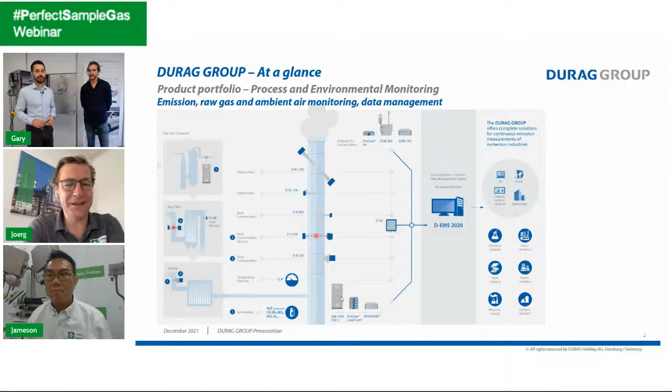It's a good point. And maybe the next screen kind of contributes to that, because you see that AP2E isn't just on a stack. It's not just monitoring process. It's also ambient, the air we breathe. And you talk about, well, I have a stack. It's quite dirty. There's a big cloud. Here we have some of the products of our group for monitoring the quality of indoor air, ambient air, or for research purposes.

And that is particles, fine particles, and also gases. And a few examples there, like formaldehyde or H2S, smelly gases. So again, it's these products that help not only a government or an authority to monitor, but it helps the company, it helps the industry to understand more about what's going through their process. Knowing that can help them to be more efficient, maybe even save money, and improve the conditions for the people around the site.

Yeah, I think that's always nice to show that these are maybe the two main showcases we have, right? The one side is really the emission monitoring, sometimes tough in terms of price requirements, because in many countries, I would say, most of the operators would just choose whatever is sufficient, but not more. And I think when you do the process analytics and process optimization, that's pretty much what you are talking about, Joerg. You talk about business cases, right?

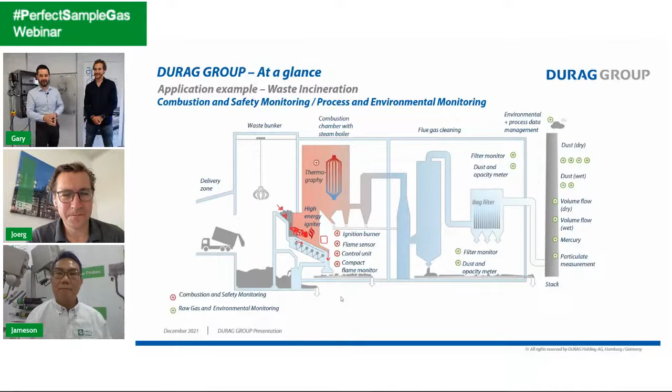Okay. Now I think it's very clear what you said at the beginning, the left part. Now it's very clear. Exactly. You can see where all of the brands suddenly arrive as a solution. So that was a very quick deep dive into DURAG. What we want to do, of course, is focus on AP2E, which is why we're here today.

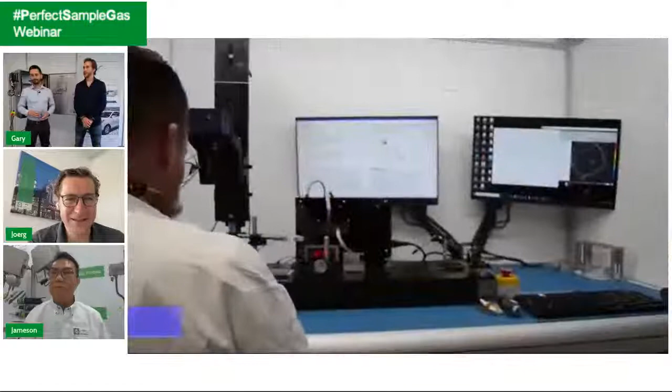And for that, I think we can give a short impression. Gary, it would be super nice if you can walk us through this video a little bit. That's starting with a quick presentation of AP2E, focusing on our production facility. So as Joerg explained very well, we are part of DURAG group, and we are a provider of new solutions for gas analysis in particular, with a very innovative way of answering the needs.

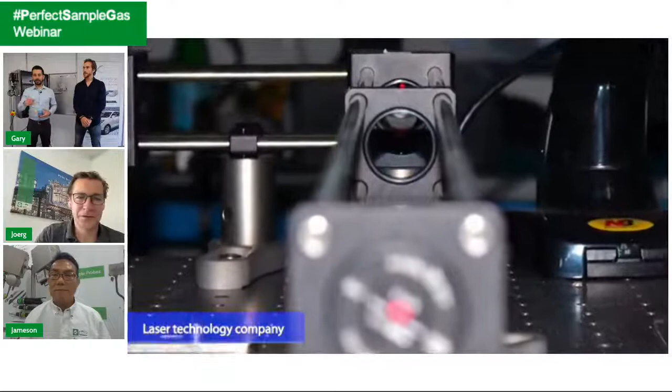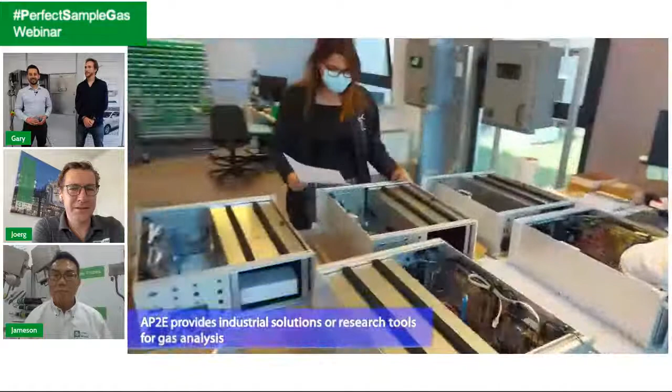That's it. We could of course run through the factory, but it's not always so easy. There's a lot of sensitive projects, so we use this video to take you on a tour through the facility. It's a bit more efficient, I think, for us, right? It's a good introduction to AP2E. So that shows your R&D facilities, and this is the production itself now. Okay.

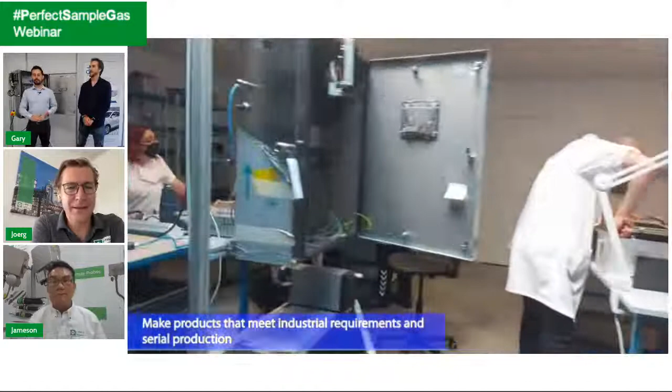You can see a wall-mounted analyzer like the one we have behind us. Earlier on, you saw the optical mirrors being aligned. There's lots of different processes. That's the technical part, more deep into optical cavities. So these are mirrors, right? Exactly. Mirrors and lasers, tuning before production. Okay, and this is the qualification at the end, the calibration.

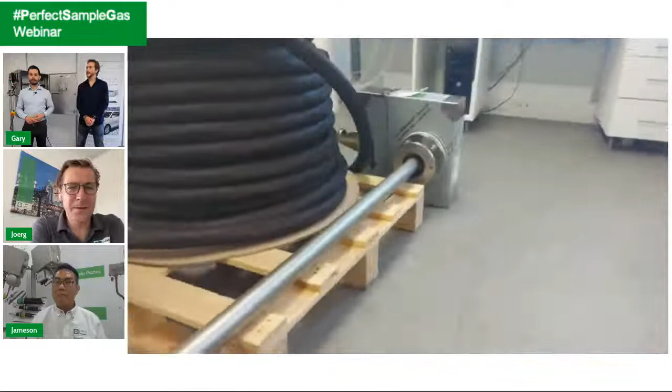Here you can see the same emission probe, and now we're switching to the metrology part. I don't know if the video is still going. No, I just stopped it. Okay. You will see just after that the metrology part, which is the heart of our company, and the know-how of AP2E.

There you go. Great. Thank you so much for this. With this video we wanted to give a flavor, right? We didn't want to just be here and not show it. So at least now you can see the different stages, the different processes, and even some of the sensitive work that they're doing there underneath us right now. Okay. Thank you for sharing this.

So I think we can jump back to the slides. Okay, sure. So there we are. And you have to double click. Yeah. And again. And again.

Yeah. And so now we can focus a little more on one of the many projects of DURAG Group, and us at AP2E. So we are based in France, south of France, and we have a lot of partners, thanks also to our colleagues all over the world. And as you have seen through those great videos, we are now about 65, and we are completely technology oriented, with more than half of us engineers or PhDs, and focused on improving continuously the techniques in innovative ways.

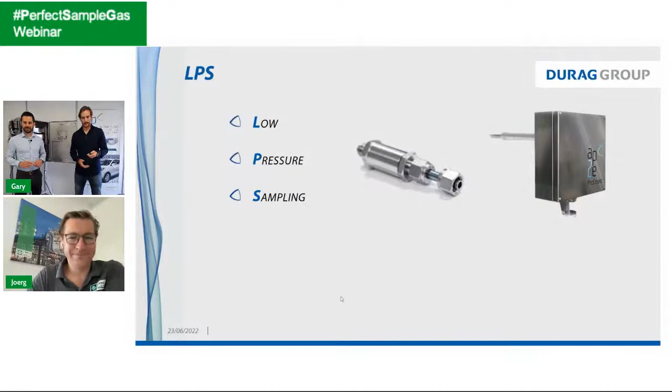So maybe, Jörg, we can go back to the slides. Yeah, no problem. Here we go. Here we are. And so as we explained, I think now it's completely clear. We have an extractive solution, so we start here with, for example, continuous emission monitoring.

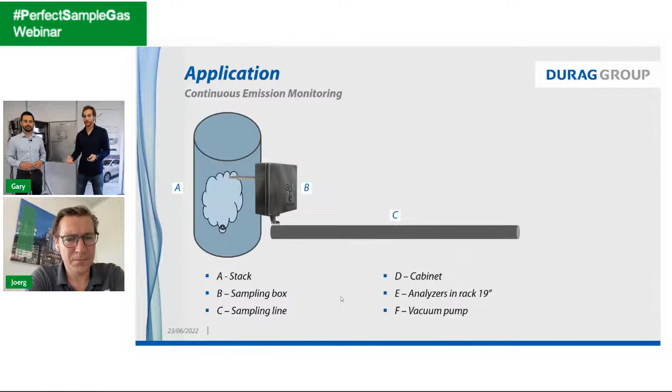So we start with a sampling box directly on the stack, and then we draw a line, heated or not, up to the analyzer. And this time you can see, as we have seen the wall-mounted version, we can also have a cabinet version like this one, with at the end, here at the bottom of the drawing, the pumping system, which is the second key of the low pressure sampling. We have the sonic nozzle and the pumping system, and without one of these, we won't be able to have the low pressure sampling.

And this is probably something a lot of people recognize when they think about gas analysis, right? Yeah, I think it's very familiar to a lot of people. It's good to see, because this may be a bit different. Let's see where it goes.

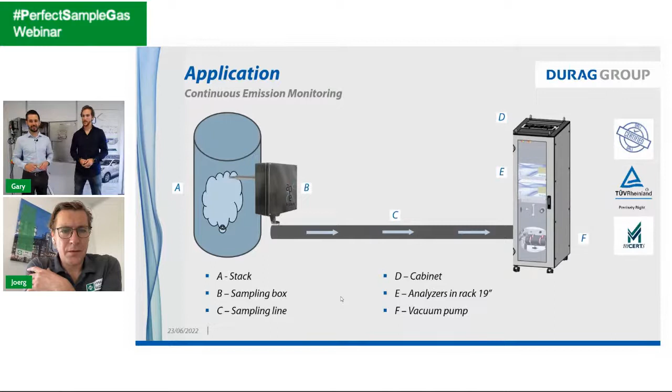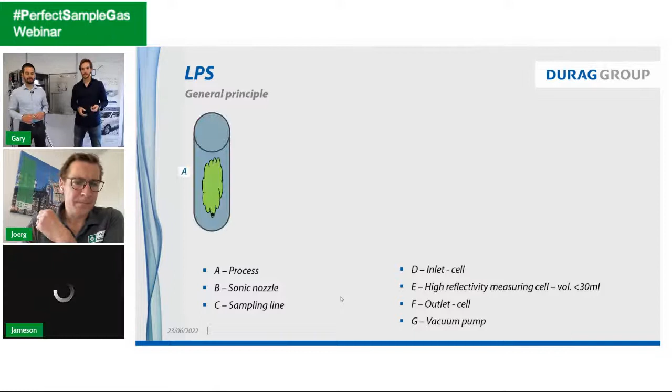So if we dig a little more in that schematic, you see we still have the process, and inside the sampling box, or directly in Johan's hands, you have the sonic nozzle. Maybe now's a point where we could show what a sonic nozzle is, because this is our sampling point here. This is point B. What's inside? So do you have an example of it? Yeah, for example, I have one here. That's my sonic nozzle. Maybe you won't be able to see anything. It's very, very small. What is a sonic nozzle?

Actually, it's a small tube with a very thin orifice on it. This one, for example, is 200 microns. So it's very, very thin. So the sample gas is coming, and it's the only way through, and this is how it allows us to reduce the pressure after that piece. Okay, so that means in the sample tube, until the point where you have this nozzle, you would have a higher pressure, theoretically, in this first section. Or in this first section, we have a filter here or something. Yeah, that's it, however long the first section is.

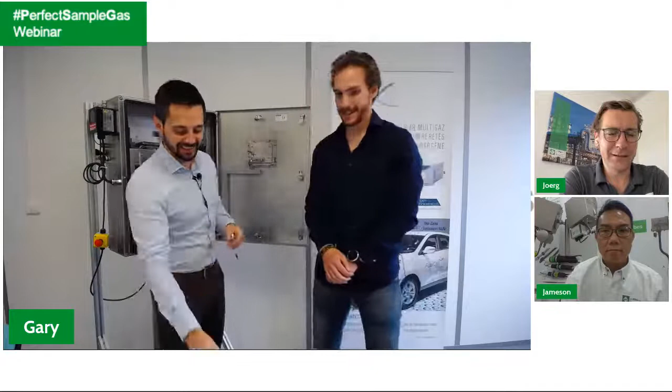After the nozzle, which in this instance I will show you side by side. You have the nozzle here. After this, this is your gateway. Afterwards, low pressure, if I'm right, Gary. Exactly, you understood completely. And so it starts right at the sampling point, directly at point B in the slides. Let's go ahead, I think it's very interesting to understand.

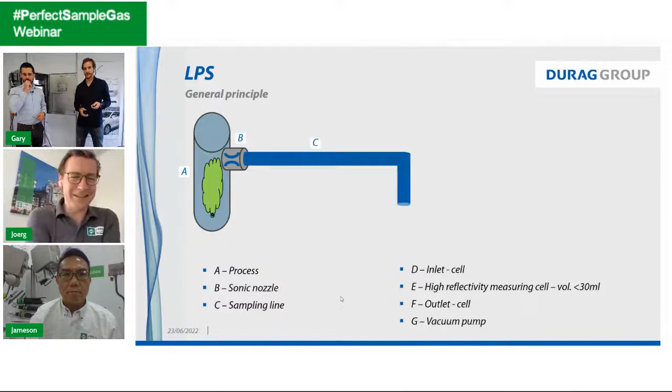So same thing as this one. We have a sampling line, and this is our cavity inside the analyzer, the heart of the analyzer, the measuring cell, and then the gas is sucked by a vacuum pump at the end, which can be integrated into our wall-mounted version, or it can be on the side, on the bottom of a cabinet.

Maybe, I'm just thinking, is it good to show it now? Yeah, I think it could be. Could you switch to my camera? Sure. Lovely, we have so many screens here. So now you can see it.

So we wanted to share a real application, a real analyzer monitoring live the ambient air in the room. So you see it here, and I will try to move slowly. Here is another version, the rack mount version. A more classical version, maybe. Yeah, people are used to a 19-inch rack mount analyzer. Same thing.

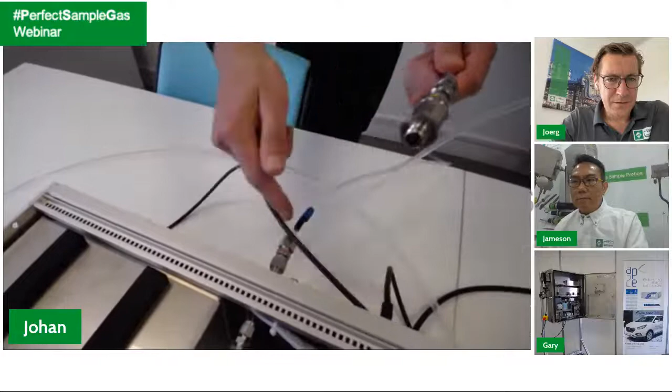So Gary, for understanding, the probe, the nozzle is connected to the analyzer or to the pump - what is the order? It's connected before the analyzer. So I have the probe here, and the probe is coming through and into the analyzer. The gas will follow through the measuring cell, and the pump is behind, sucking through.

But I mean, we could show it if you're ready. Yeah, we can also show a bit more about it.

So inside this box, you have some laser. Of course, we have to switch off the analyzer before, for safety reasons - we'll turn it off for our own safety and to keep our eyesight. So please go ahead. You shouldn't get cut or anything hurt from the laser.

This is the second heart, I would say, of AP2E's technology - this is the optical block. So with the measuring cell, as you have seen in the slide just before, the laser and some optics on the bottom. Here we have optical mirrors and reflectors, with an incredibly high reflectivity that allows the product to have an incredibly high sensitivity and selectivity.

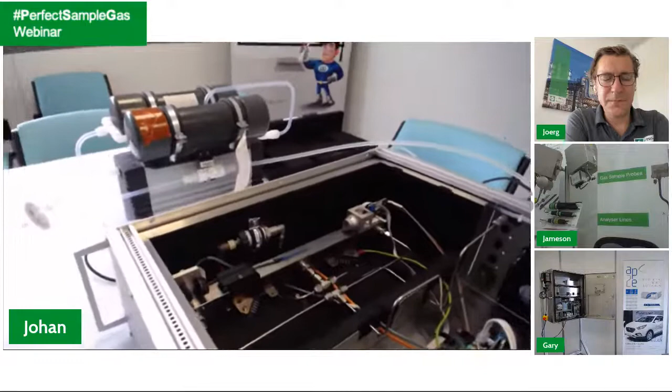Though you have seen that we are able to measure 3 different gases with only one laser in this application, we can also add another cavity just on the side of the first one, with a different setup and another motherboard, some electronics, in order to increase the number of gases we can measure, and give a turnkey solution, for example for CEMS applications, when a lot of gases are needed. So this is like the basic configuration, and then depending on the application, you would be flexible to add more benches to measure more gases.

Exactly, and more lasers too. Just on one cavity here, we can have one laser, as you see, but we can also put a second laser just after it, so we can have up to 4 lasers into one analyzer. Wow, that's impressive - then it's quite busy in there. I can imagine. Nice to see, thank you for sharing.

So I will remove this camera, and I will put you and the presentation on again, because I think from my side, Jameson, I need a little recap. Actually, what I'm doing, Gary, maybe this is not a new exercise for you, but I'm trying to compare the traditional way of sampling with your way.

So I think at point B, we would have a traditional heated gas sampling probe, which is responsible to do the filtration of any dust or any remaining parts which you don't want to have in your sample handling system. And typically at C, the sampling line in our cases would be a heated sample line, heated above the acid dew point, because we are still hot at this point in a traditional system. So I think it's very interesting to see also the comparison.

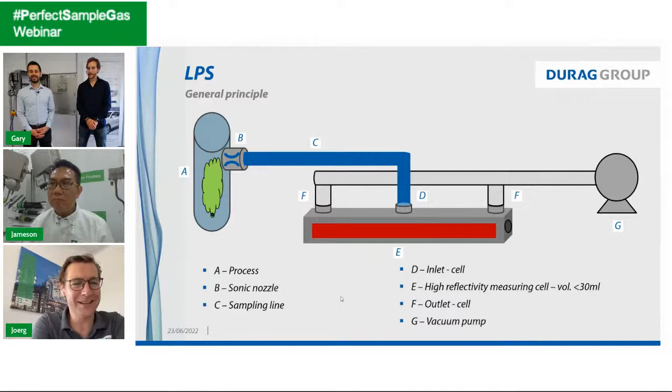Absolutely. And as you said, traditionally we need these 3 components, as you have shown us. Here with AP2E, we still need a heating line for some applications, but sometimes it's not necessary. As you explained, you can have cold and condition monitoring analysis, and you can have hot-wet monitoring directly with the raw gas, and that's where AP2E is positioned.

So if I may ask, Gary, because there's also one question - we will have the Q&A session at the end, but this is just a question popping into my mind. If we would have a lot of dust, because process measurement - I mean, we recently discussed when we have the CEMS, there's only a limited amount of dust left at the sampling point, but especially when we talk about process measurement, we might be in a very dusty part of the plant, right? So how do you do this in your sampling?

Yeah, that's a good question. As you said, I think any kind of extractive analytic system has some limits regarding the dust, but still we can cope with it in a traditional way to get rid of it. For example, we can implement a backflush from our analyzer directly to clean the sampling probe. Also, this is one of the features of low pressure sampling - thanks to the small amount of gas we are collecting, this also reduces the pollution effect.

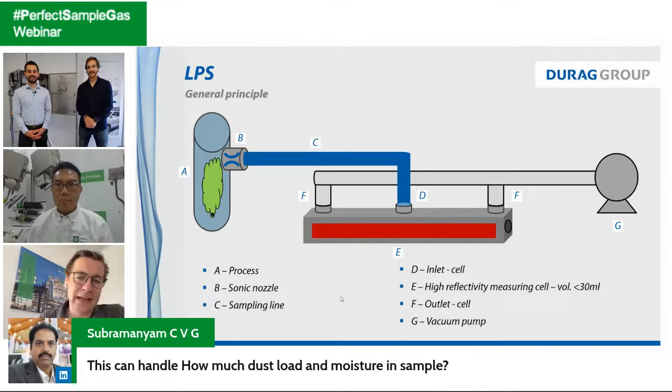Okay, that's interesting. And regarding moisture, I think this is also the dew point question - I would say it's also interesting, right? But you're going way too fast. Okay, sorry, I will show you with the other slides. We can go to the dew point just after that. Yeah, okay, great, sorry Gary. Go on. No problem, no, keep it coming.

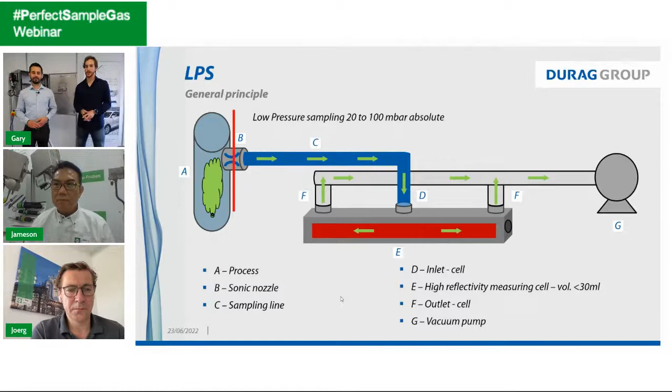Good question. This is the gas path, but I think we got it now with the practical example. So as we said, the low pressure sampling is started at the sampling point, and we are adapting the pressure between 20 to 100 millibar absolute - so more than 10 times less than the atmospheric pressure.

And that gives us the pressure effect, first of all on absorption, as the low pressure is all the way in the sampling line, but also inside the cavity, the measuring cavity. You can see that there is clearly a great effect on the absorption peaks. In purple, the line is almost at atmospheric pressure, and the blue one is at 100 millibar absolute. You can see that it allows us to differentiate and avoid the cross interferences, or allows us to measure different gases, as you just have seen in real, within one laser.

It draws a very clear picture, doesn't it? When you look at the 100 millibar compared to 800, you can really see a much clearer picture of what's going on in my sample. Yeah, you can see on the right, particularly the right part is - wow. So is it roughly double the sensitivity, or not double, but quite an amount? It allows us to reach a very high resolution, right?

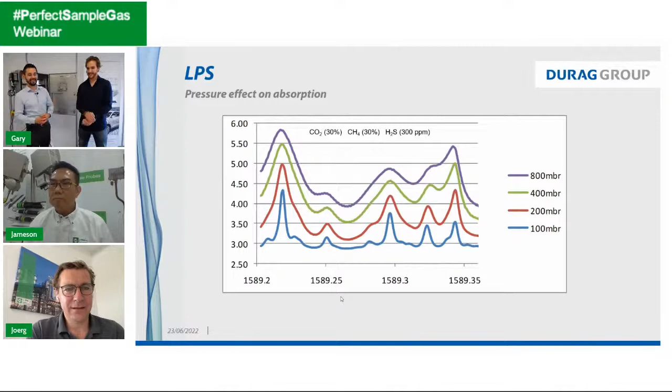Maybe that's the next webinar, the measuring technique in the cell. But again, it's a big special part of AP2E. We could do a whole talk on it, but I think the next slide is quite interesting as well.

So Jameson, here we are. Can you see the animation, Jameson? Yeah, the spectrum.

So you see, if we increase the pressure in the cavity, the absorption peaks are vanishing, and you are not able to measure anything properly. Back to low pressure sampling, you are able to distinguish different gases. This is the absolute benefit of that low pressure system. Reduce the pressure, and you can see a massive difference from atmospheric down to where we're looking.

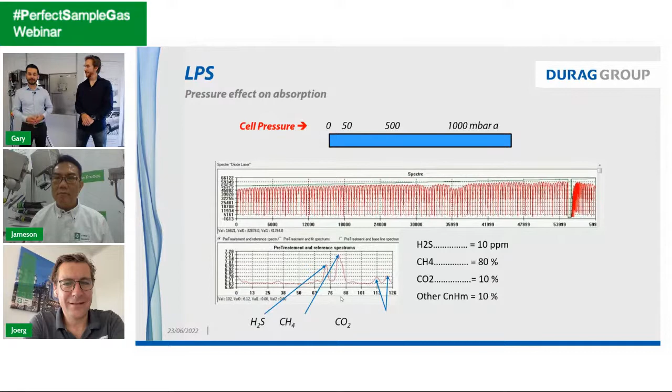And of course, you asked earlier about moisture as well. We also have benefits on the dew point, because at atmospheric pressure, everybody knows that water is boiling, transforming from liquid to gas. So if you are at 100 degrees Celsius, and if you go below that temperature, you will condensate in the sampling line, in standard sampling lines.

If we reduce the pressure, however, we reduce the dew point in the same way. And that allows us to keep measuring hot and wet gas without condensing, without conditioning the gas. Sometimes for stack applications, we still need to heat the lines because the amount of water is sometimes significant. But in most cases, we don't really need a heating line.

Still we need it sometimes, and a heated line may typically run around 180 degrees. I don't know the most common temperatures they run at, but it could be that we need something in the middle, maybe 80 degrees.

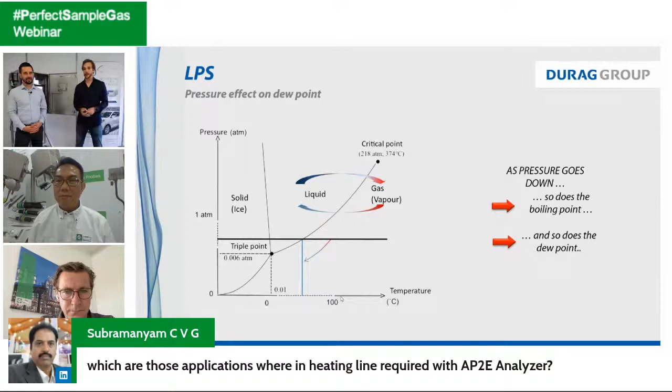A great question. Basically, when you have more than 30 to 40% water, we will start to need a heating line. So it's typically emission applications when you have a lot of water in the stacks, when before the stack you have some treatments, and then you have a lot of water. Otherwise it's in some very specific process applications when you have a lot of water.

And again, the line might not need to be 180 degrees, but maybe 80. If you compare to classical technology, we would maybe need only 80 degrees Celsius heated line, or 45 degrees Celsius, depending on the amount of water. And that's one of the strengths of AP2E, being able to adapt.

If you're looking at your analyzer and your maintenance, your service, your cost of ownership, the temperature at which you run your heated line - if you can drop that to 80 from a traditional method to an AP2E method, I'm sure there's cost savings over the lifetime of the analyzer. It's not only that, it's also better to use less energy, right?

And from a technical side regarding heated sample lines, if you only have to keep up a temperature of, let's say, 80 or 100 degrees C, we can use self-regulating cables. It's a very easy technology, I would say. So you don't need to worry about temperature controlling and positioning of the PT100 sensors and all this stuff. So I think that principle has some advantages.

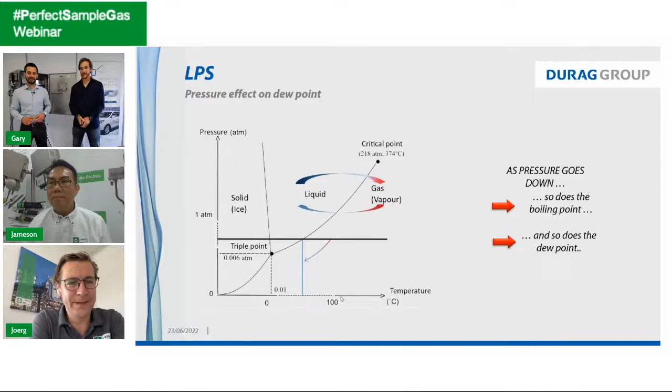Yeah, Gary, I think we have to cut this short a little bit. But I would be super interested to see what components you can measure. That's for sure one of the main questions now, as people understood the sample handling and the principle. Let's go more into the possibilities of the analyzer.

Maybe just one small point to confirm what we exchanged together just before. As we are sucking much less gas than classical solutions, we have much less pollution in the filter. Still, we have a filter, of course, to protect our system, and it allows us to make the life cycle of the analyzer much longer and to protect it.

And still, with the low pressure sampling right at the beginning, you still expand the gas and create an acceleration of it proportional to the low pressure. So it still allows us to have very fast response time thanks to this system.

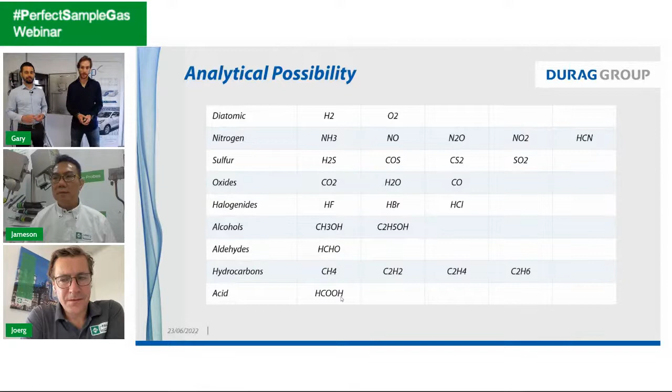If we continue, here is the table of all the gases we are able to measure with our analyzer. As you have seen, we can measure in ambient air some ammonia, or methane and N2O. This is one of the applications. And here it's the comparison between what gas we can measure and the various applications we can answer. For example, we have natural gas.

Natural gas monitoring is very important in terms of H2S or H2O. And thanks to the low pressure sampling, we are able to go down to sub ppb level in some applications. We also have, as we just saw, ambient air monitoring. This is, for example, greenhouse gases or ammonia.

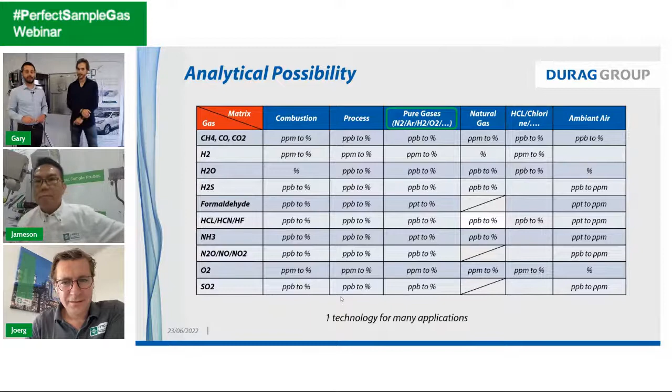We also have pure gases, for what we call gas manufacturers. I think this is a good opportunity to provide solutions for gas monitoring in various different gases, depending on the impurity and on the process before it. And it's a great matrix. Here you see ppb a lot, but you even see ppt. Yeah, this is why it's critical to have the right sample handling and our LPS, our solution.

Wow, I think that's quite impressive to see the resolution, how low you can measure down.